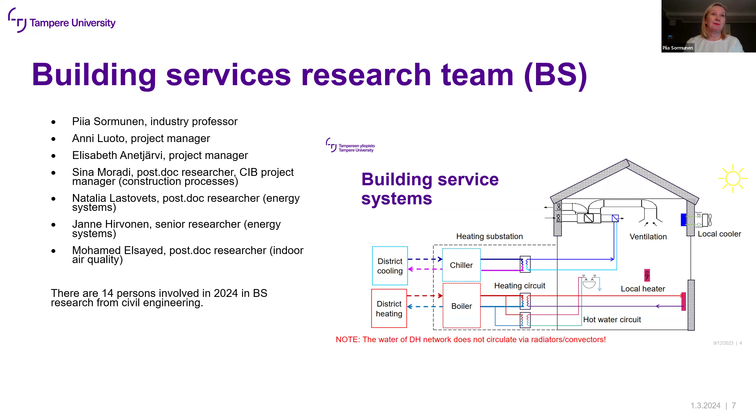In my research team, we are all together right now 7 persons. Mainly I have postdoc researchers and a couple of project managers. However, we have altogether 14 persons involved this year in our research team, from civil engineering, construction economy and so on. When I started the industry professor position, I was alone, I didn't have a research team. So I have built a research team and applied for funding for the research team for the last 3-4 years, and I think it's going well.

And what we want to do, and what is our scope. As we know, we have very big challenges. One is green transition, and the green and energy transition requires actions in construction and real estate sector. I think it's the same all around the world.

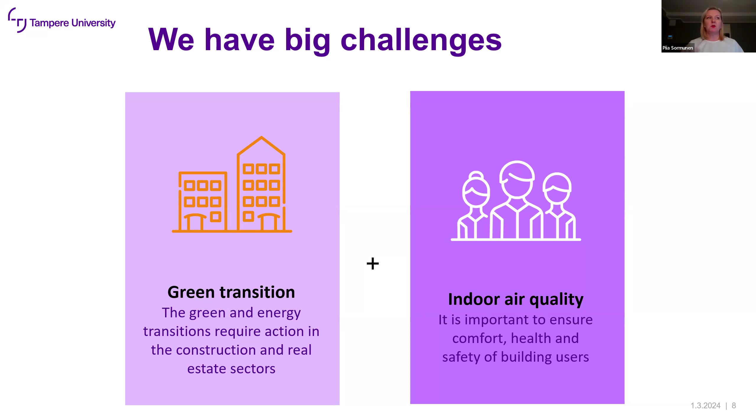Another issue is indoor air quality. As the pandemic showed, it's very important that we have very good indoor air quality, and also the pollutions and outdoor conditions affect the indoor conditions. In that way, these building services systems have a very big role in having very good indoor air quality. So we have these two areas, and we work with carbon neutral buildings and indoor air quality.

And what is the interest in that? The first is the life cycle management of different kinds of building services systems. We are interested about construction processes, and how to develop processes and business models so that we will aim for carbon neutral buildings and have good indoor air quality at the same time. And the third thing is the technology, data digitalization in smart buildings. That's a very important area, as we know.

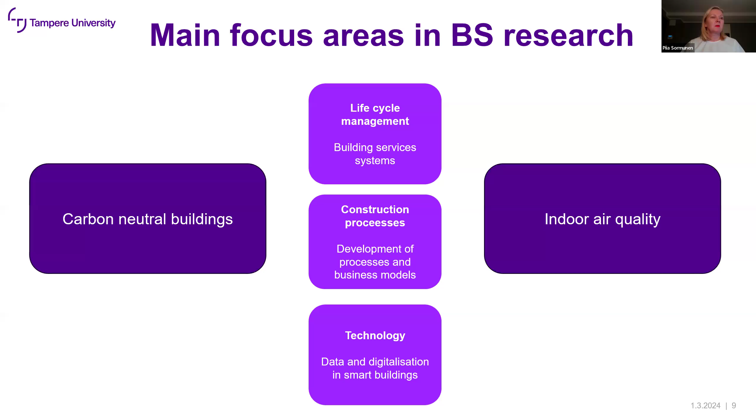Right now we have four very big projects going on, and our research portfolio for this year is 1 million euros, maybe 1.1 million or something like that. And we do all this in very strong collaboration with the construction industry. In all our research projects, there are companies involved.

And the biggest one is the pandemic response strategies, E3 projects. You can see the websites, and if you're interested, you can visit them.

And also you can, sorry, my daughter came home.

Yes, sorry, this introduction. The other one is the HybE project, which I will tell you later today. The third one is the RECO2 project, where we develop a concept of smart carbon neutral building blocks. And the fourth one is a bigger program about building services and vision for 2030. So we have lots of work to do this year.

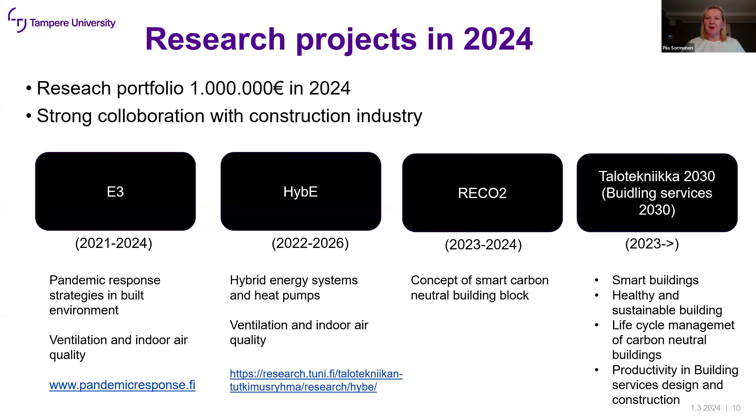Okay, about EU climate goals. The EU has set a goal that we will be carbon neutral by 2050. As we know, buildings account for over 30% of all greenhouse gas emissions, and 40% of energy consumption is attributed to buildings. In that way, improving energy efficiency in the building stock is crucial for reducing emissions.

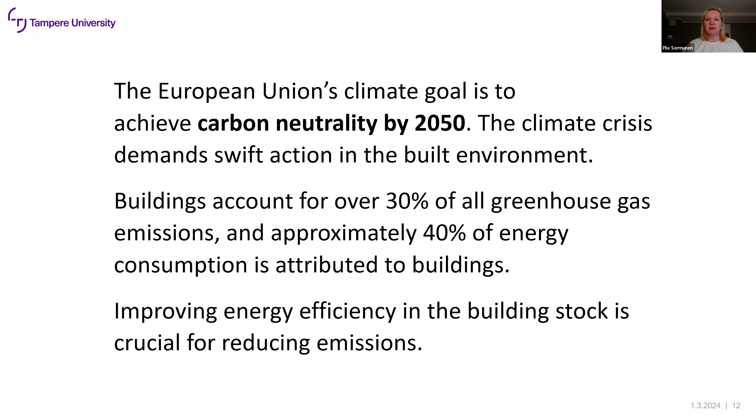The other thing is that, if we consider the EU level, 85% of the building stock was constructed before 2001, and it's estimated that 85 to 95% of these buildings will still be used in 2050. Lots of work to do.

And we know that existing buildings are not energy efficient, and energy production heavily relies on fossil fuels. We have had an energy crisis in Europe because of the Russian gas, and we don't get it anymore. So yes, lots of work to do in the existing building stock and renovations.

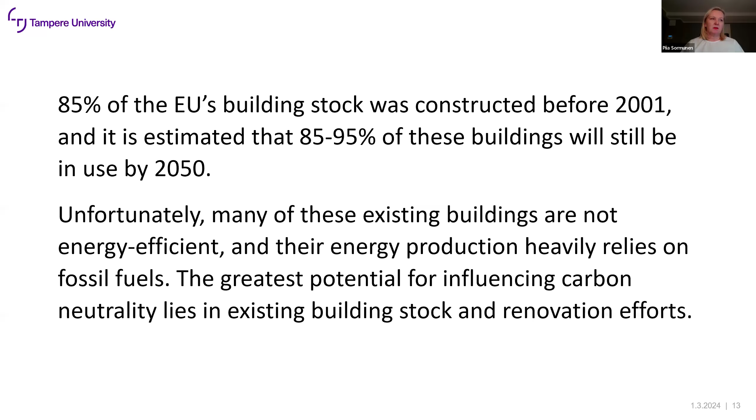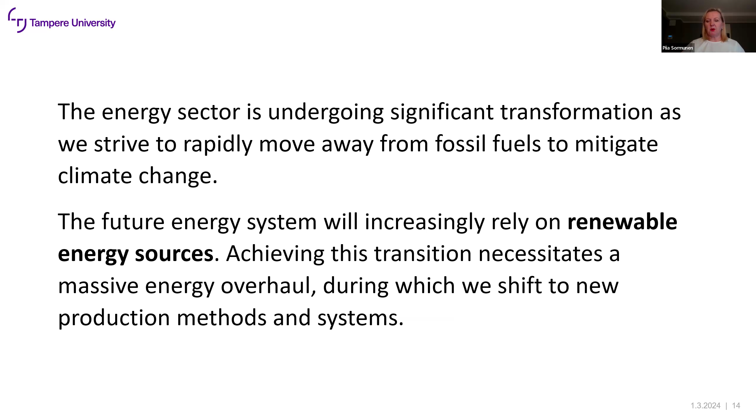And what is happening now? We understand and trust that the future energy system will rely on renewable energy sources, and this means we need to work with the processes, technology, and also business models to achieve that.

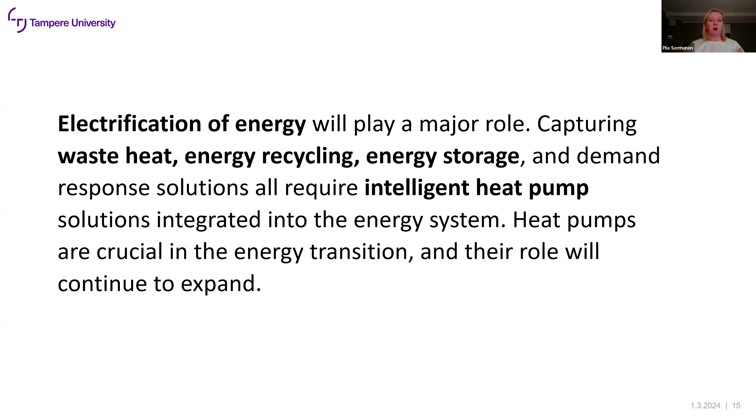Electrification takes a big role, and especially heat pumps - using heat pumps for different purposes, capturing waste heat, recycling energy, using energy storages. It's a very important part of the energy transition, and heat pumps' role will be more and more important in the future. But it means we need more research, more education in this area, and we need more designers in the construction sector to understand different kinds of technologies, especially these hybrid energy solutions.

And in that way, it's a very important area to work with, and one of our main areas in Tampere. Now about the hybrid energy solutions in buildings, what it means.

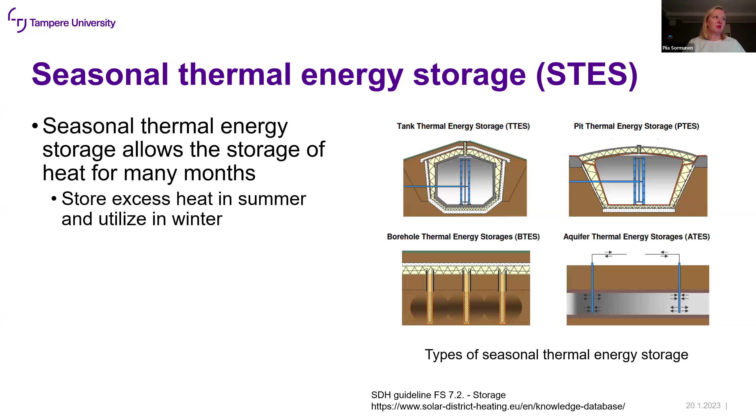Seasonal energy systems are not used so much, but we are still doing quite a lot of research in that area, on how we can utilize thermal energy storages. Boreholes, of course, are very important in the systems. As I mentioned, very deep geo boreholes are coming, and we are planning to start research in that area also, in the city area, which will be very interesting.

Now some examples of buildings with hybrid energy systems. Here is one building, the Decar building, which got this heat pump award.

This building uses heat pumps with many heat sources: ground heat, sewage from the building, grocery store refrigeration, waste heat, and it also takes from the cooling grid of the building. It's integrated with district heating so the building has a backup from district heating in certain situations. It has 16 boreholes for heat storage, also used for seasonal storage, and uses free cooling at certain times of the year. The building also has solar panels.

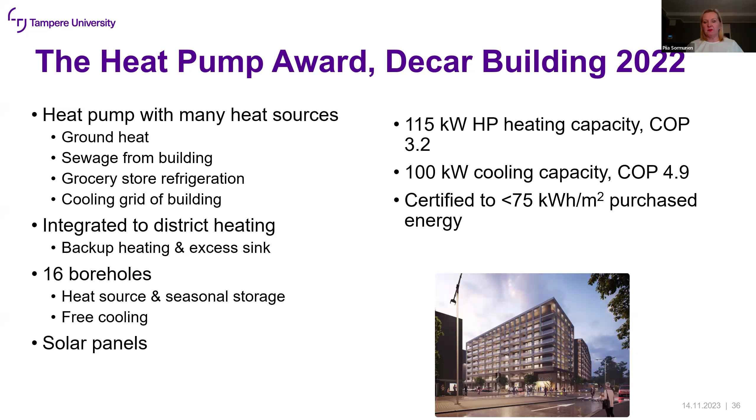The total heat pump capacity was 115 kilowatts, with COP 3.2 - that's very good. The cooling capacity is 100 kilowatts with COP 4.9. This means it's certified at lower than 75 kilowatt hours per square meter per year for energy - very good, and very widely used different kinds of heat pump heat sources.

Another example is about energy renovations. It's a building with 54 apartments, built in 1980, which went through this kind of renovation program. In the first phase, the energy renovations included, for example, new doors, windows, new radiators, valves, and thermostats, heat distribution calibration, and also balcony glazing - that's very popular in Finland, which you have because of the climate conditions.

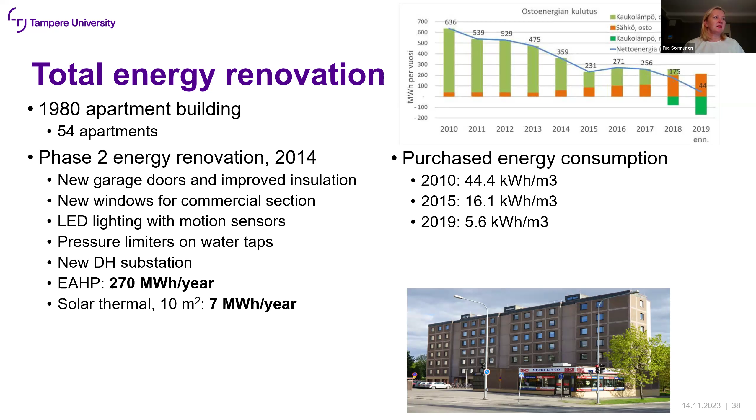And next year, or next phase, the new garage doors were installed, and insulation was improved. New windows for the commercial section were installed, LED lighting, and pressure limiters on water taps, and so on. And also heat pump.

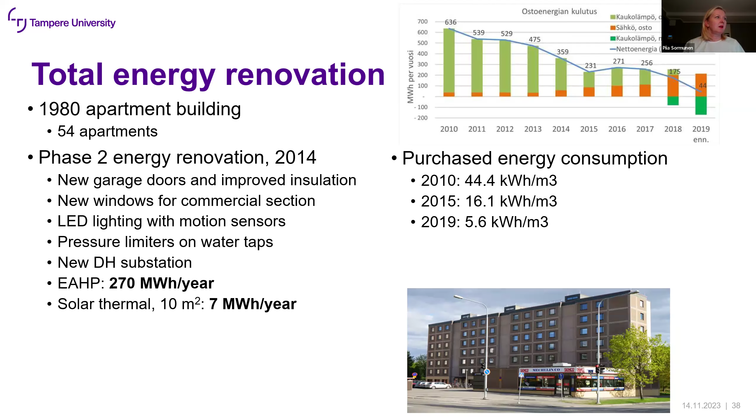Now I have to say, yes, heat pump production and solar thermal energy, yes, in that case, even solar thermal, 10 square meters. And finally, in the third phase, they installed 5 boreholes, 300 meters deep, and installed sewage heat recovery and solar electricity, and installed decentralized cooling and also electric boiler for the peak loads.

And also they have a two-way district heating selling system and EV charge points. So it meant that they could come really much down with the purchased energy consumption from 2010, and it was from 44 down to finally 5.6.

And of course, if you consider all these systems as renovations, it has cost quite a lot of money. This project was done with EU grants to test it and to see how low the energy consumption we can come down to with different kinds of heat pump technology and different energy renovations. And it shows that it's really possible, but sometimes it comes to a limit - what is economically feasible. So always, even in a renovation, when considering different kinds of hybrid energy systems, it's good to consider what is the optimal solution for that purpose and for that building type.

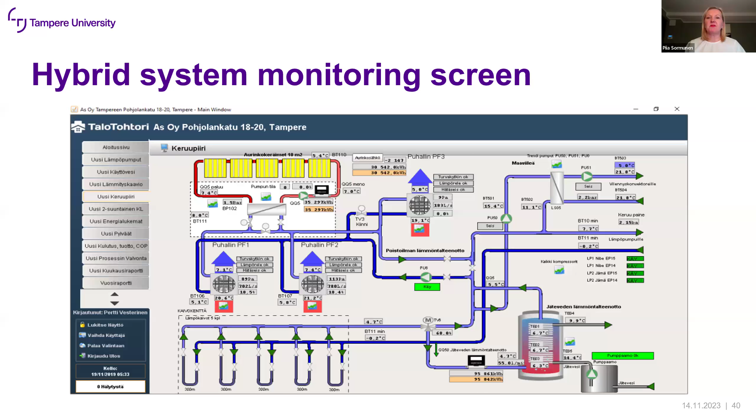And here is a very, very messy, maybe, picture about the hybrid system monitoring screen. I wanted to show that because it's very important that when we have a hybrid system - for example here, solar thermal collectors - we can follow energy production and also temperatures, pumps and so on, pressures. We can follow PV panel production.

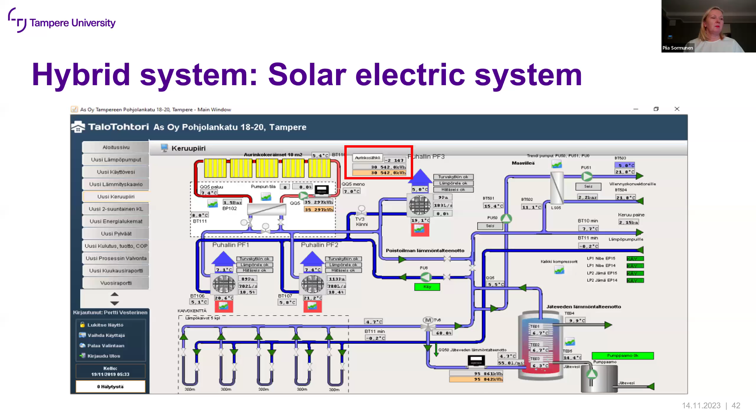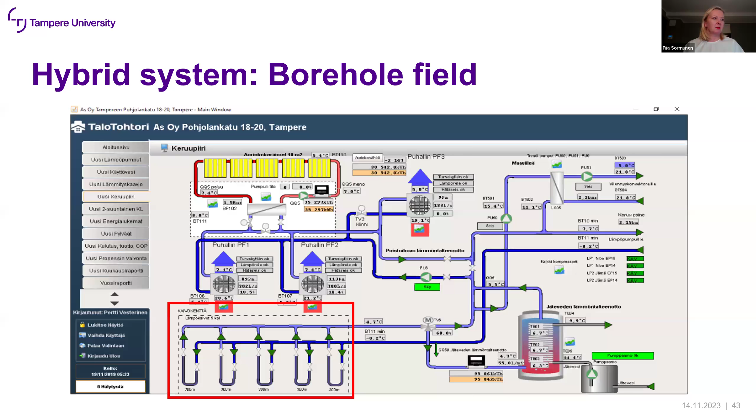We can follow ground source heat pump production. We can also follow the cooling system. We can follow altogether ventilation, heat recovery, sewage heat recovery. And that's very important because it's very important that the system is working properly.

And as we understand, the more we have different kinds of technologies and systems, it's always possible that the building is not working as designed, as constructed. In that way, facility management has a very big role in following up that the building is working properly. And this is something we need to work with, and something we wanted to also work with in this HYPE project.

Yes, I don't have much time anymore, so I will go very fast.

In this project, we are concentrating on the construction processes, building energy management, and real estate business - different kinds of areas. And the main goal is to eliminate carbon emissions and achieve sustainable energy efficiency. And how do we do that?

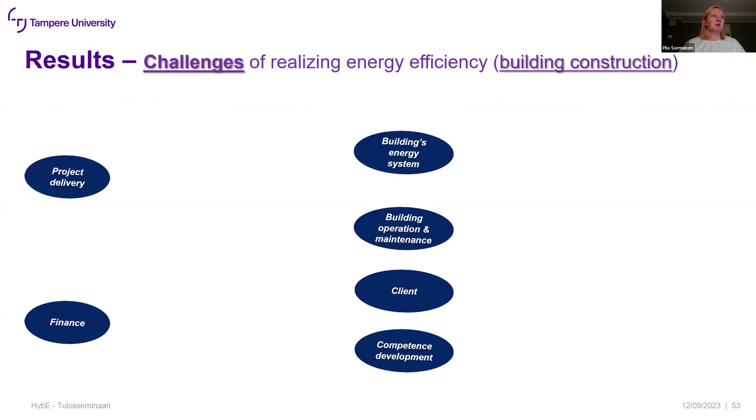The first one, last year, was energy efficient building project delivery, and we wanted to study the different challenges we have in construction. We noticed different challenges - you may visit the website to see them - and we also tried to find solutions for how to solve the problems.

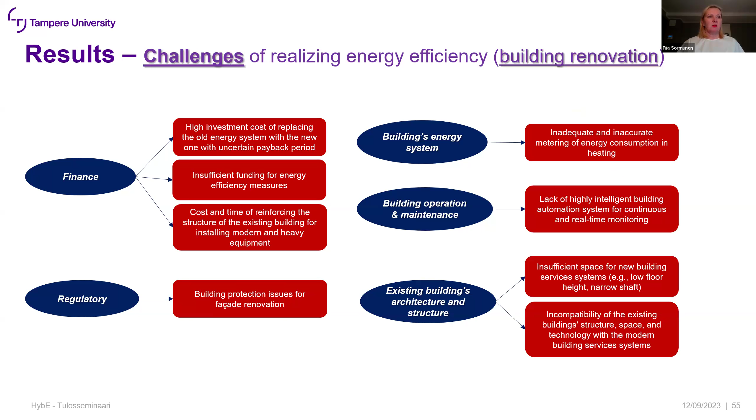It was both new construction and also building renovation work, and the main project manager was Sina Moradi - I think you, Mark, know him - and Sina was leading these projects. Very interesting, I understand. And finally, we developed a collaborative project delivery model for how to take care of sustainable building construction, and we are continuing with that.

Another one was a hybrid energy system tool used for optimizing different systems. As I mentioned, it's very important to optimize hybrid systems. This tool takes into account, if we consider renovation, the real consumption data of the existing building right now. Based on that, we can optimize the best hybrid energy solutions for the building and analyze the results. It's a very easy to use tool, very good.

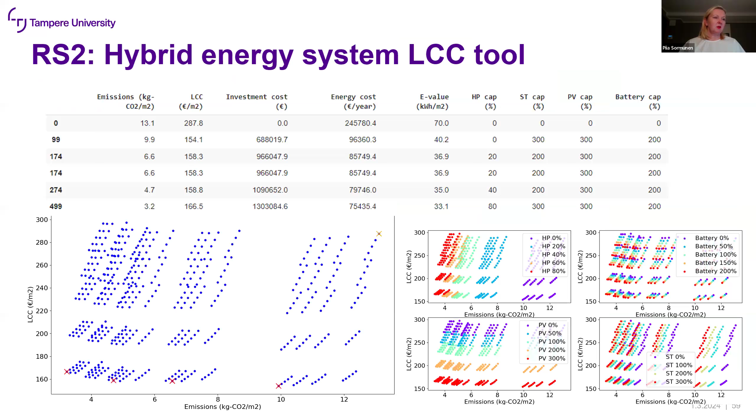The third research sprint was for real estate owners, about regulations. There's a huge amount of different regulations in the EU right now, and we need to understand what they mean - the EU taxonomy, EU climate law, and a program called Fit for 55. It's important to understand these. Right now we are working with different collaborative delivery models in sustainable construction projects, risk management of building energy renovations, and solutions for area-based energy production.

These are the research sprints we're doing this year, next year, and three others. It's a good way to work with companies. If you're interested in these results, you can find all the journal articles and conference papers on the website, where you can get all the information about the projects.

And now I want to thank you. If you have any questions, I'm really happy to answer now or later.

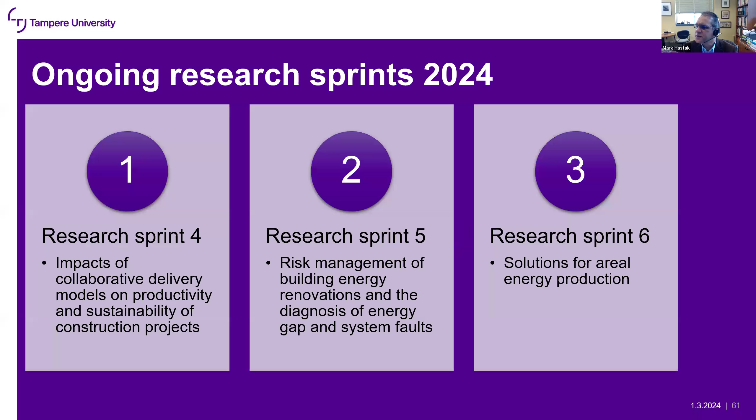While people are thinking about their questions, let me ask one of mine. You talked about different energy sources that are being used, and I was wondering which one do you think is predominantly used in Finland?

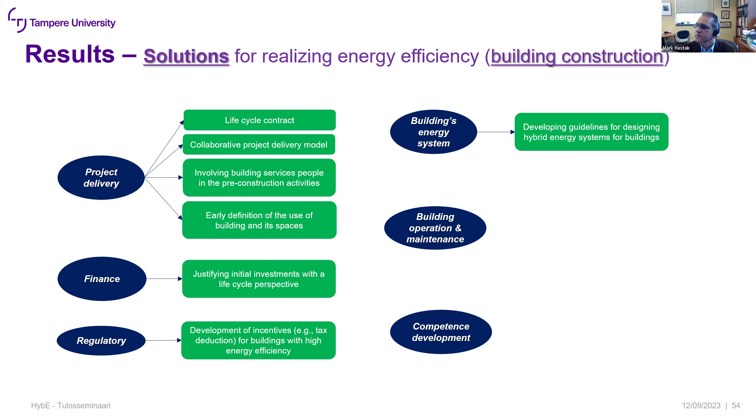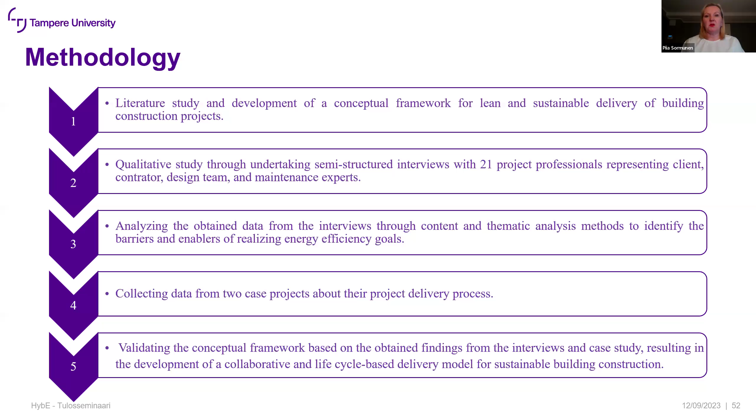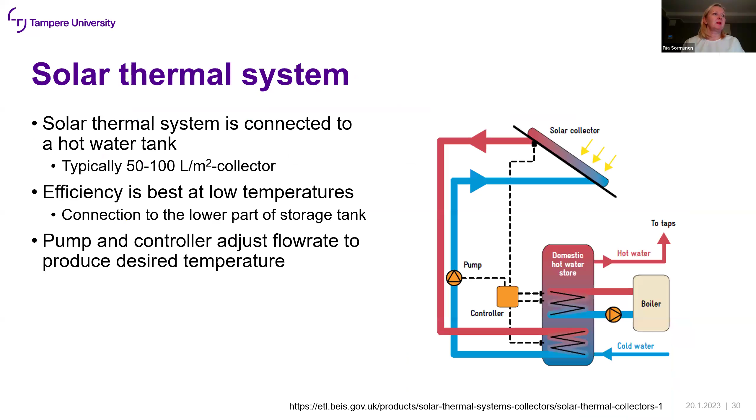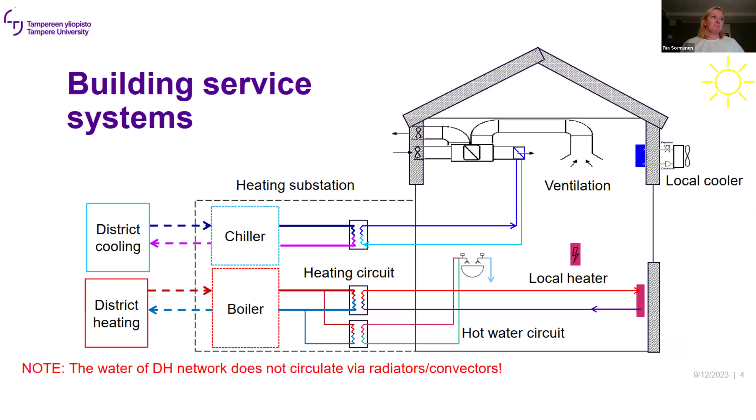Yes, if I think about residential buildings and housing, air-to-air heat pumps are mainly used - quite low-cost systems. But when we consider, for example, office buildings, ground source heat pumps are the mainly used systems. It depends a little on the building type. But also in housing and residential buildings, air-water heat pumps are getting more and more popular, especially in new buildings and new houses.

So what about there in the US? What do you think, in housing, do you use heat pumps? I will defer that question to Professor Widener. Okay. Yes.

Yes, okay, it came very fast, my question. It's your time to ask me questions - I started to ask you. Sorry, yes, Ted, didn't mean to put you on the spot. So my question was going to be, among these five different heat pumps, which one gives the most efficiency in the environment that you are?

Overall, the ground source heat pumps are the best ones because they're not so much dependent on weather conditions. With air-to-air systems, we are always dependent on weather conditions, and it affects the COP of the system.

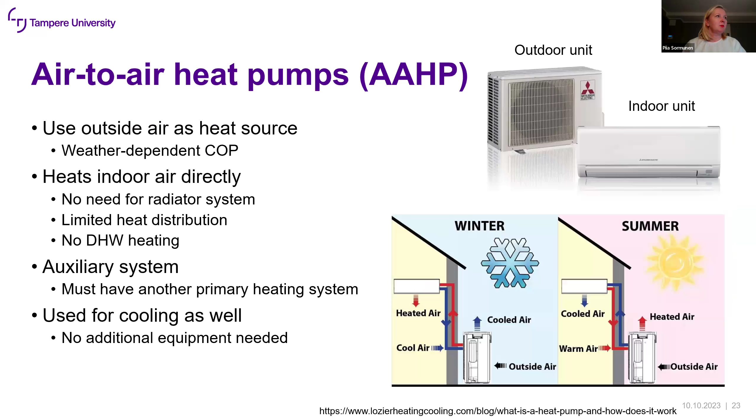You mean heat pumps overall? Heat pumps, yes. Air-to-air heat pumps are quite reasonable price and quite a lot used. For example, in our house we installed an air-to-air heat pump - it was something like 3,000 euros for the whole system, so a quite reasonable price. If we consider air-to-water heat pumps, it's a bit more expensive, but less expensive than ground source heat pumps, because with ground source heat pumps you need to drill boreholes, which is quite expensive. But many times, in a life cycle perspective, you will get back this investment cost. Exhaust air heat pumps, I think, are something similar to air-to-water heat pumps. So I'd say the cheapest is air-to-air, and the most expensive is the ground source heat pump system with boreholes.

So let me follow up on what Majid asked earlier - given that in Finland it gets quite cold compared to us, for instance, what is the efficiency of the ground source heat pumps, and how deep do the boreholes need to go to really make it optimal? Yes.

Yes, this is a good question. The boreholes, my understanding is that we go to 200 to 300 meters. Normally, before they start a project, they do this kind of test drilling to see what the ground heat capacity is. That way it depends on how deep the boreholes need to be drilled - that's the best way to do it. But in Finland, we are testing right now very deep boreholes, like 2 kilometers, and in that way you don't need so many - you can have only 1 or 2 to use the ground heat for heating or cooling.